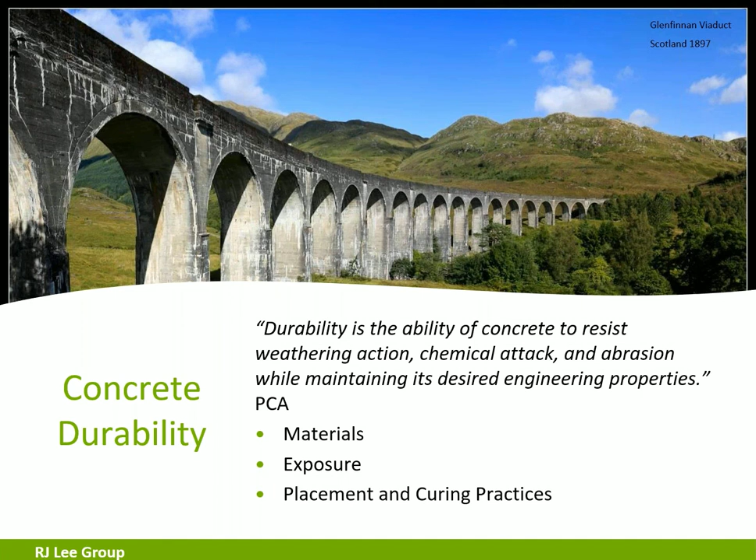Concrete is the most widely used construction material in the world. When it's done right, it can provide decades of service with little to no maintenance. But the conditions of exposure and the use will affect the performance and service life. So the concrete needs to be designed, proportioned, transported, placed, finished, and cured properly in order to achieve its intended service, which some applications are expecting to be upwards of 200 years.

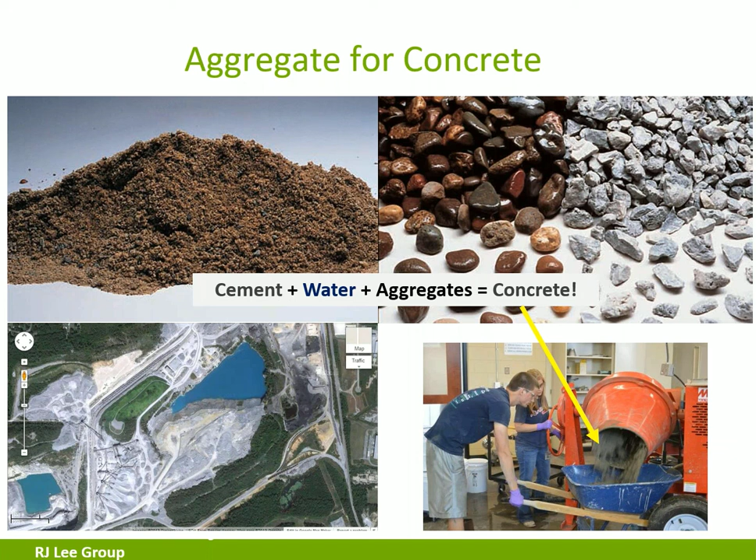The aggregate comprises about 70% of the hardened concrete by volume, and they're more than just fillers in concrete. The aggregate properties greatly influence concrete performance and strength. Qualities of the aggregate can affect the ability of the fresh concrete to be properly mixed and placed, which then can affect the hardened properties and the durability. Many of the negative qualities and properties will be flushed out with preparation and testing to meet the requirements for concrete following ASTM C33, in addition to specifications that are specific to the application, which may include some additional testing and validation of quality.

When we talk about concrete durability, there are several of the most common mechanisms known: corrosion of the steel reinforcement, freeze-thaw cycles, alkali aggregate reactivity, which includes the alkali silica reaction and alkali carbonate reaction. Chemical exposure has another effect on concrete, and that can be sulfate exposure, both externally and internally, seawater attack, and exposure to de-icing salts. Some other reactions are abrasion, erosion, and physical salt attack.

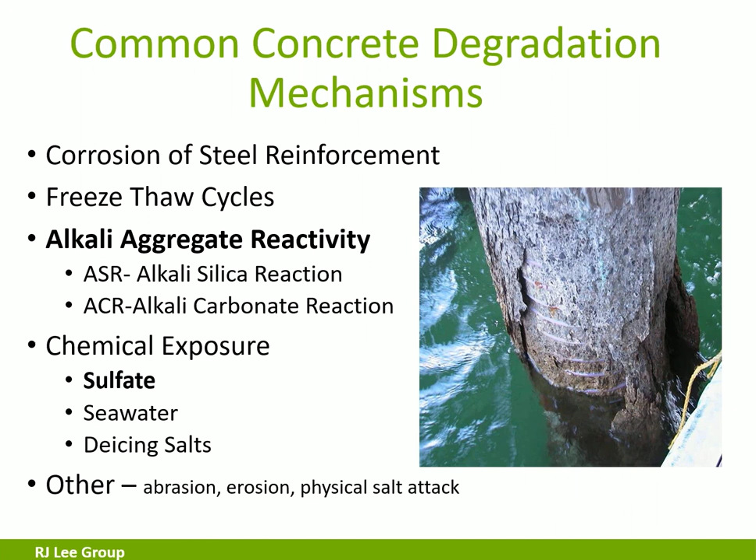So today we are going to talk about the chemical reactions of the aggregate with the cement paste that can affect long-term durability. In particular, that will be the alkali aggregate reactivity, and sulfate, which is actually going to be internal sulfate exposure.

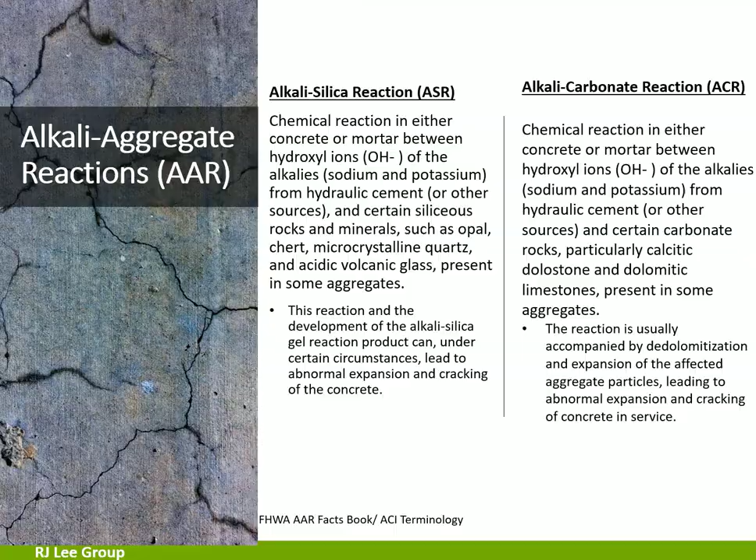So what is alkali aggregate reactivity? Well, we have two kinds. There's ASR, the chemical reaction of the hydroxyl ions of the alkalis with certain silica components of the aggregate. This reaction forms a gel, and under some circumstances that gel can cause expansion and cracking. The other type we have is alkali carbonate reaction, and that is going to be between certain dolomitic aggregate and alkali ions. We'll talk more about that in a minute.

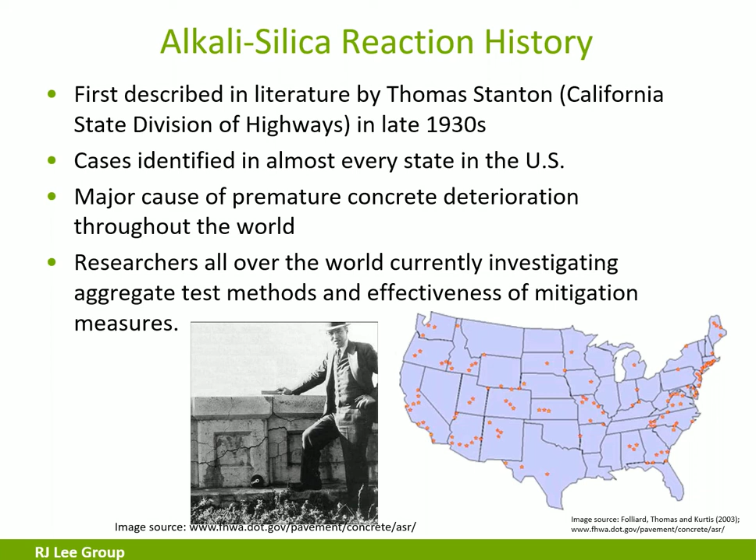Although ASR was first identified in literature in the late 1930s by Stanton, it was observed and documented in many dam structures even before then. It's been studied extensively for decades, and researchers all over the world have dedicated their careers to the topic with really no end in sight for finishing the work. It is a complicated chemical process with many variables and areas of study. We've seen cases in almost every state in the United States, and again, all over the world. It is a major cause of premature concrete deterioration.

So how does it work? Basically, you have a reactive silica component in your aggregate. Some of those reactive components are opal, tridymite, volcanic glass. So basically, it's a type of quartz that is not ordered.

You'll also need sufficient alkali in the pore fluid and moisture. Once that alkali starts attacking the aggregate, it forms an alkali silica gel. That gel expands with water, cracks the concrete, and once you have the cracking, it allows for more moisture to come in and start the process over. So it really is a cyclic reaction.

The source of alkali in the pore solution is going to come mostly from the cement, but we're studying more and more where that alkali could be from the aggregate. You'll also get a little bit of alkali-bearing water intrusion in certain circumstances.

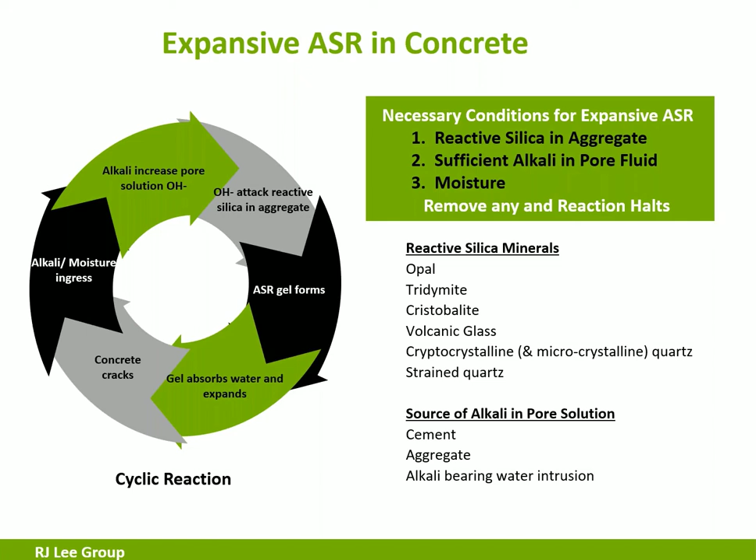So here's an example of some of the damage found from ASR. We have a barrier wall, a lock and dam. That is the physical damage you can see. And then there are a few examples of the microscopical damage we see to confirm the presence of ASR.

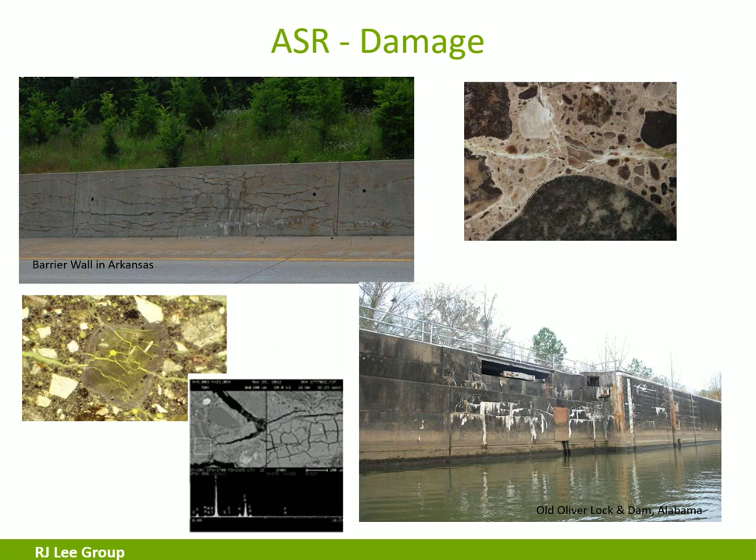Alkali carbonate reaction is not very common. It was first observed in Canada in the late 50s, and it's mostly found in certain dolomitic limestones. Many of these ACR susceptible aggregates are actually not suitable for concrete due to their porosity, which makes them a little susceptible to freeze-thaw damage.

So a lot of them really get flushed out in the C33 testing. Damage shows up pretty quickly here, but there is stark debate in the research community whether the damage to structures by ACR is actually being caused by alkali silica reaction, which is sometimes seen in correlation with damaged structures.

So what happens with ACR is you begin to get dedolomitization of the dolomitic aggregate, and that causes expansive brucite formation. We're finding a lot that sometimes that expansion is correlated with some ASR expansion from very fine microcrystalline silica within the aggregate as well. So that is still under debate.

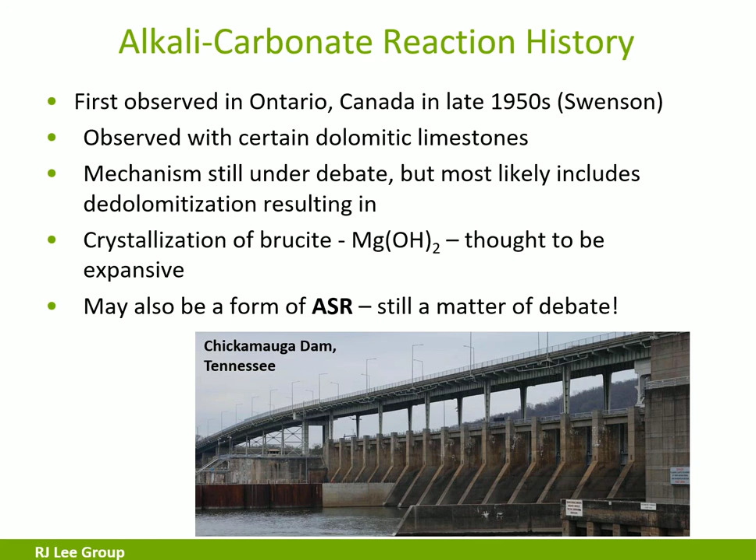Test methods and guidance for alkali aggregate reactivity have had more varieties than geologists have descriptive terms for rocks. It's really hard to decide what to do and how to do it. There are a few guidance documents that have really mapped out a path to understanding the reactivity potential of your aggregate and how to use it in concrete without issue.

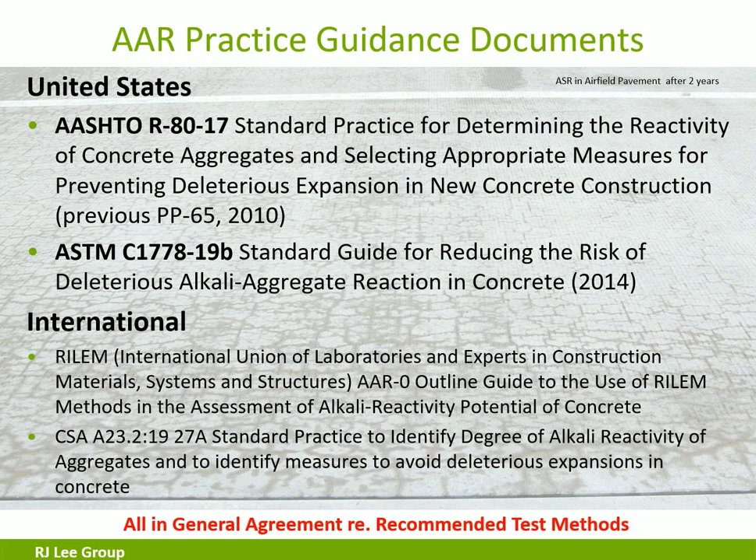In the United States, we have the AASHTO R80, the ASTM C1778, and there are international standards as well. RILEM has a guide, and the Canadian Standards Association. The important thing to note about these guidance documents is they really are all in general agreement regarding the recommended test methods.

The United States guidance documents were developed predominantly from data and recommendations provided by the Federal Highway Administration ASR Development and Deployment Program. That initiated in 2007 and went until 2013.

There were three primary scientists that led most of those investigations: Michael Thomas of University of New Brunswick, Benoit Fournier of University of Laval, and Kevin Folliard, University of Texas. If you go to the Federal Highway Administration website, you'll see all of the reports from these studies on there.

It's really a result of decades of research from scientists all over the world. The test methods recommended in these guidance documents are based on rigorous method validation and correlation with field exposure sites and field history. They have put exposure sites all over the world in many different environments and different mixes, correlating the test methods to establish long-term performance, and also evaluating the long-term performance of current mitigation strategies.

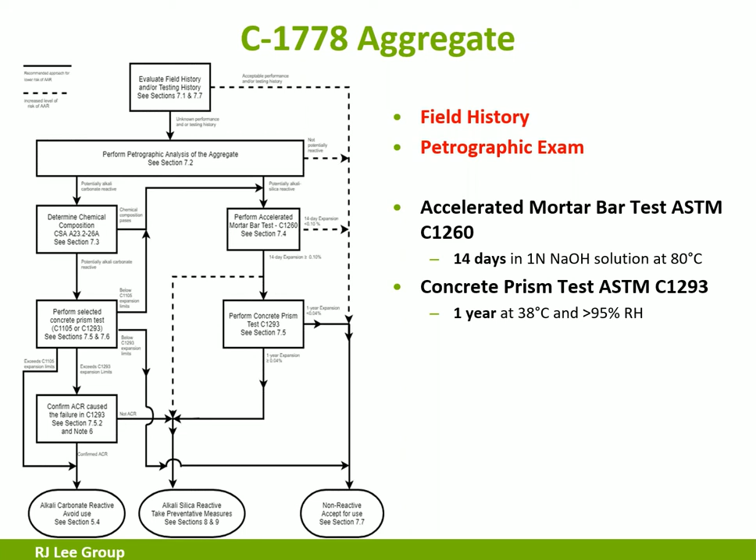So the guidance documents really are driving the specifications. Investment in testing may be high initially from a characterization of what you're working with, but then a subsequent testing regime can be driven from that existing data that you gathered, from requirements from your purchasers.

Some agencies do require your tests to be within 3 years old. And if you have some significant aggregate changes, you may need to do additional testing as well. But you really just want to know your rock and prepare for the worst case scenario to keep you from costly legal issues. Now, this isn't an easy topic.

Extensive research has been going on for decades, and we still haven't developed the perfect test to predict performance. I do suggest that if you're having a hard time understanding this, use a consultant who's knowledgeable on the topic, and they can really help you navigate the guidance and protect your investment.

Looking ahead on the ASR issue, there are some promising test methods that are being evaluated at this time. When I say they want new test methods, you want accuracy, and people just want results fast. There's a miniature concrete prism test and concrete cylinder test that is very promising. Some other methods under development and validation include just modifications to the concrete prism test through RILEM.

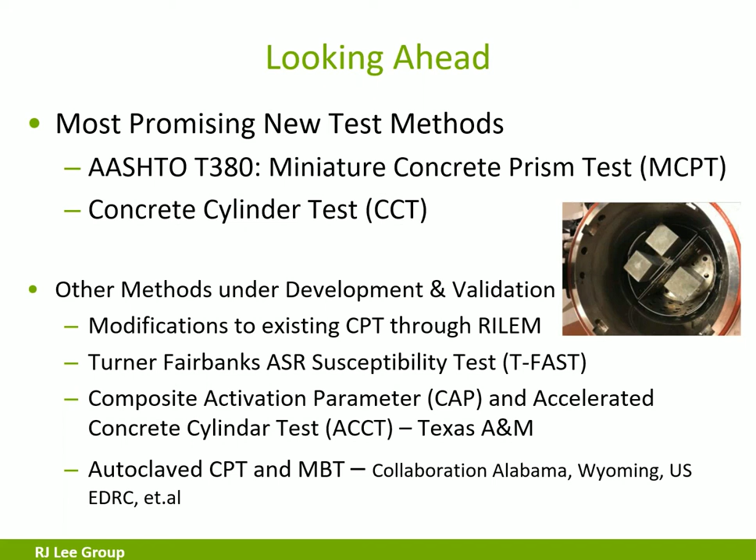There's extensive literature in the acid mine drainage area. As they were mining for coal, you're uncovering shales, predominantly with pyrite in it, and that pyrite reacts with oxygen and creates sulfuric acid, and that sulfuric acid can obviously cause a lot of damage, and it also discolors.

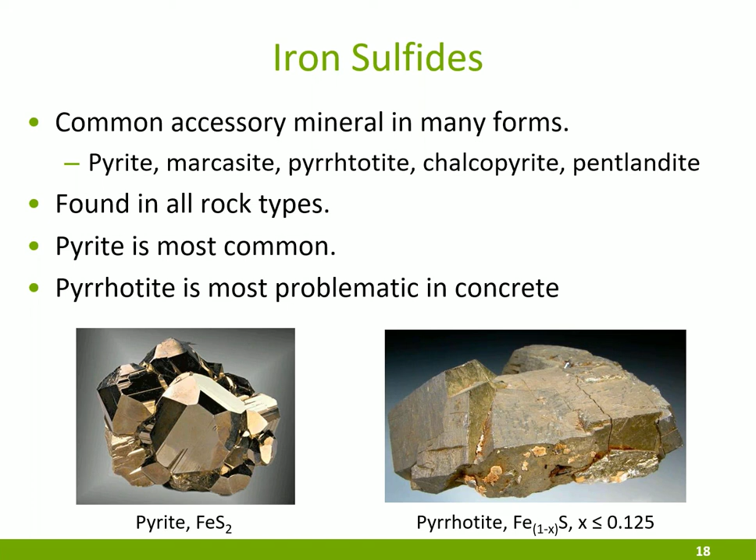Related to aggregate production, access to air, the first sign that you have a problem is that you'll have rusted stockpiles. So again, access to air is number one. And what we found is that material above the water table may have had some weathering already done, where the reaction had taken place previously, so you don't have the severe staining. But once you get below the water table, the rock hasn't seen air before, and that rust and oxidation really takes off pretty quickly.

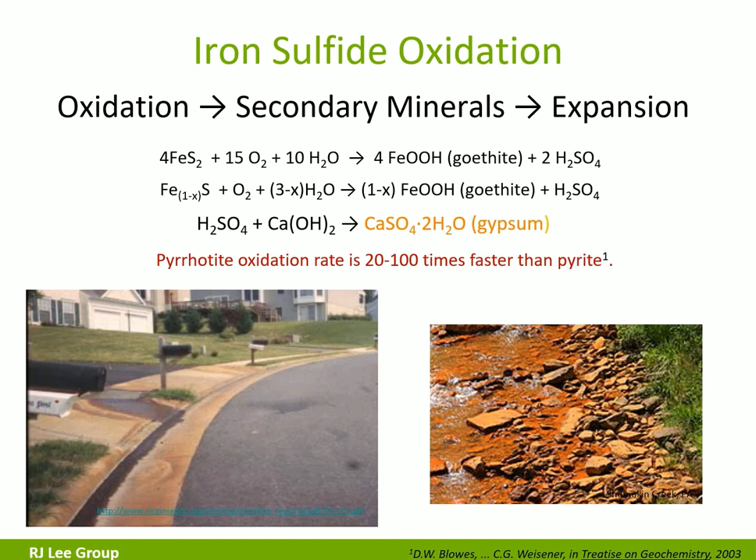When you're talking about having these minerals in aggregate and concrete, the oxidation creates sulfuric acid. That reacts with the paste in the concrete and forms secondary minerals like ettringite and gypsum. These are expansive, they decrease the pH, and you get cracking. In the worst damaged examples, you get thaumasite formation, which creates a very friable paste. It became so friable that you could break the concrete with your hand.

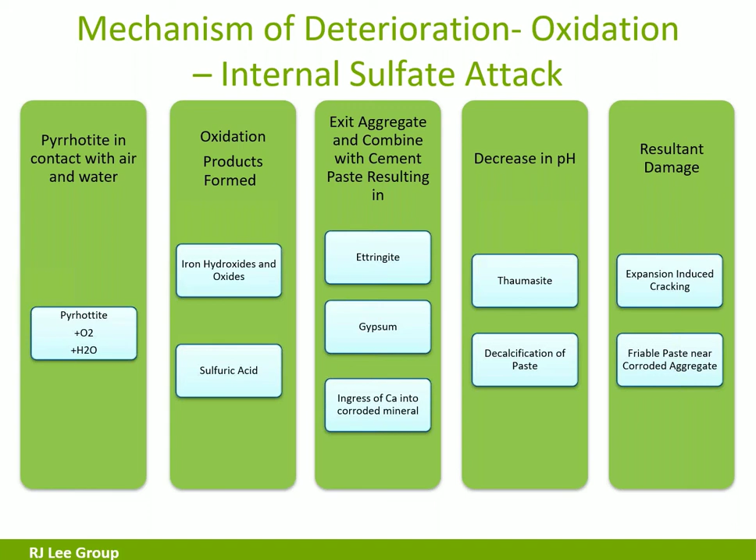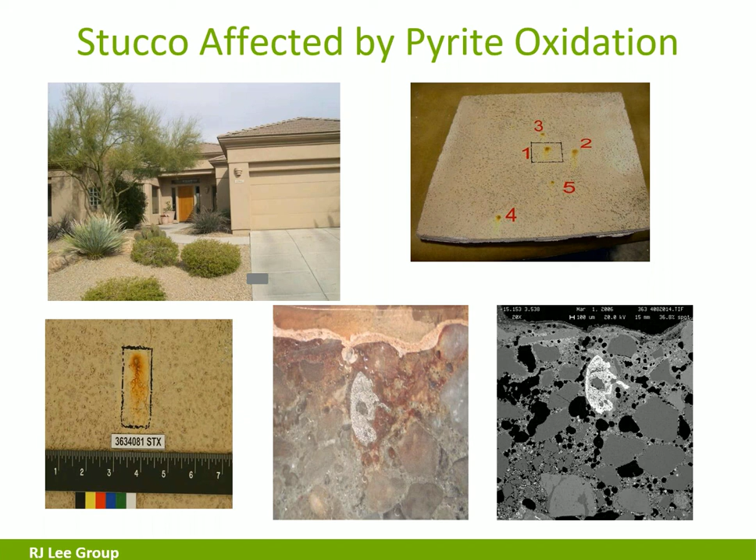There are two recent examples of this problem. The first started showing up probably around 2009, maybe 2006, in the Trois-Rivières region of Quebec, where problems really started within just a few years of construction and these foundations began cracking. In the United States, we have an area of Connecticut which has shown the same or similar kind of damage. These structures were constructed in the early 80s, and it really came out of one quarry in that area — a schist. The damage took about 10 to 30 years mostly to show up.

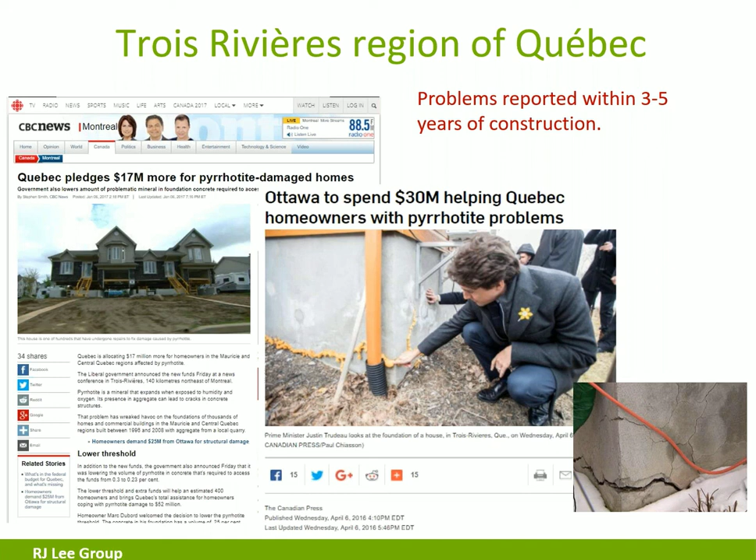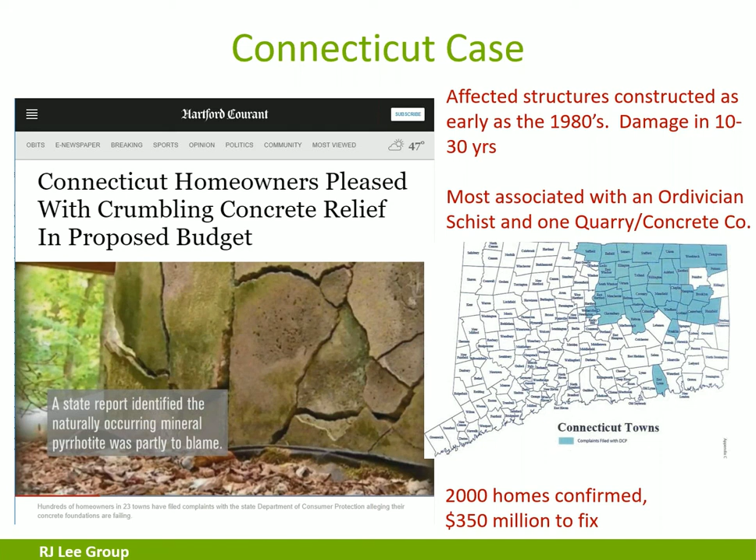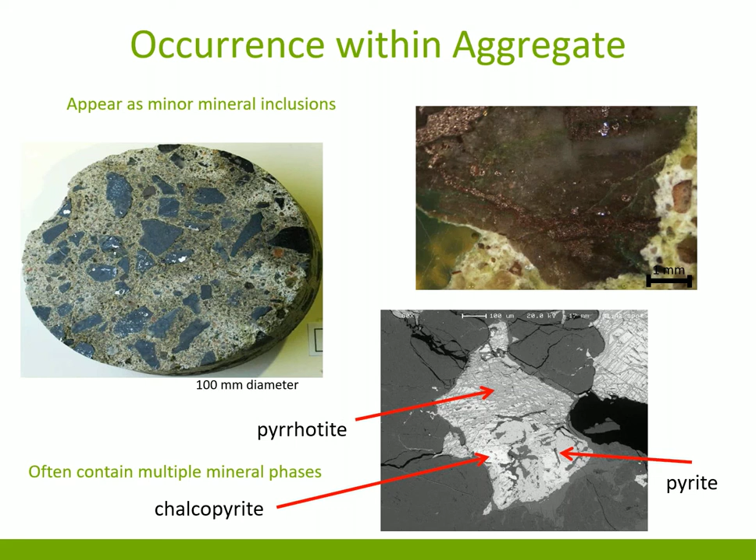There are a number of factors that aren't fully understood about why pyrrhotite can cause damage in one area and not as much in another. Some factors have to do with the quality of the concrete — if you have concrete with high porosity, which enables more air to get to it, you're going to have more damage. We also look at the crystal structure of the pyrrhotite; it comes in a number of forms, and some appear more reactive than others. Environmental conditions matter too — we're finding that relative humidity has a big effect. Buried structures that don't get as much access to air, much like rocks beneath the water table, seem to be more durable and show less reaction. Unlike a foundation wall where the interior surface is exposed to air in your home — the damage really progresses quickly through those walls.

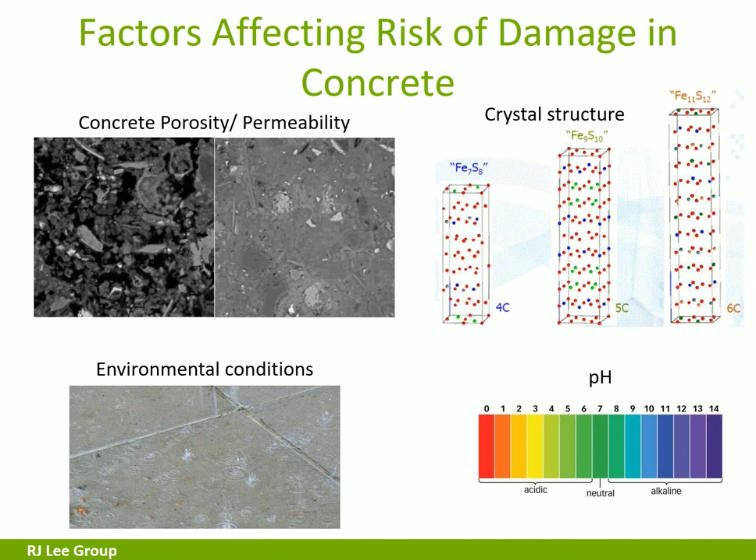Right now, there are no established standards with limits for rejection of aggregate in the United States. The Connecticut DOT does prohibit the use of aggregates with greater than 3% pyrrhotite by mass, based on visual inspections. I don't think they've found any since they started that in 2017.

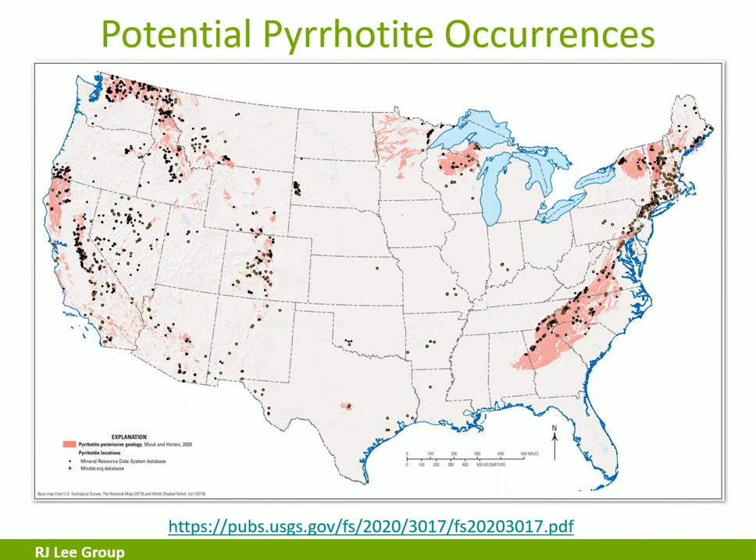The Canadian Standard Association has been doing a lot of research, and they have developed a testing regime for evaluation of the total amount of sulfur in your aggregate and whether it has a potential for damage. That's actually an appendix to their standard, which means it is not mandatory at this time because they are doing additional testing to come up with the correct values. But they do have a nice program that I am going to go over quickly, because really it is the best avenue for us to go down at this time.

Part of it is a performance evaluation for the determination of deleterious oxidation potential of sulfide-bearing aggregates. The first part, you're going to do a field evaluation of the aggregate source with the geological survey and sampling, and some field performance in concrete. If you have concrete that's more than 15 years old using the same aggregate in an oxidizing environment, you can test that to evaluate if a reaction is occurring. The last part is a laboratory investigation and interpretation.

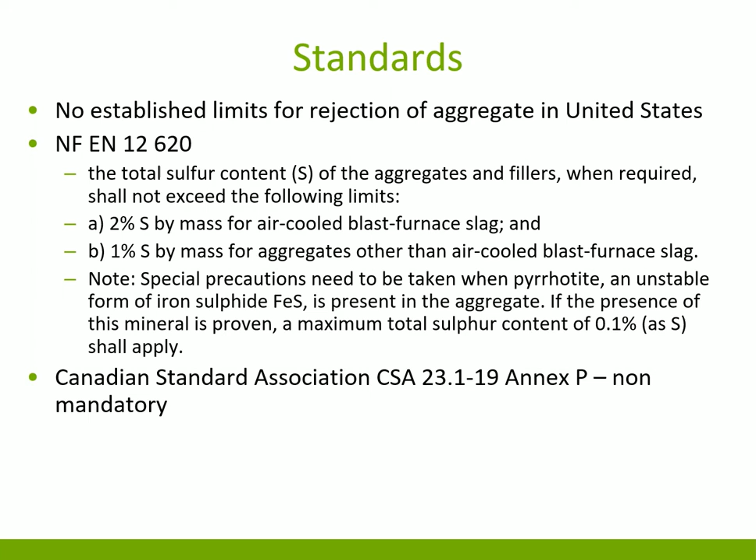In the laboratory investigation, you first look at the total amount of sulfur in your aggregate, and from there you can identify how much of that total sulfur is sulfide sulfur. Based on some European standards and information we have, if your aggregate has more than 1% by weight of sulfur, it's going to be rejected, because even if it's just pyrite, it could cause staining problems. If your total sulfur is less than 0.1, you can accept it. If it's in between, you'll want to test it further.

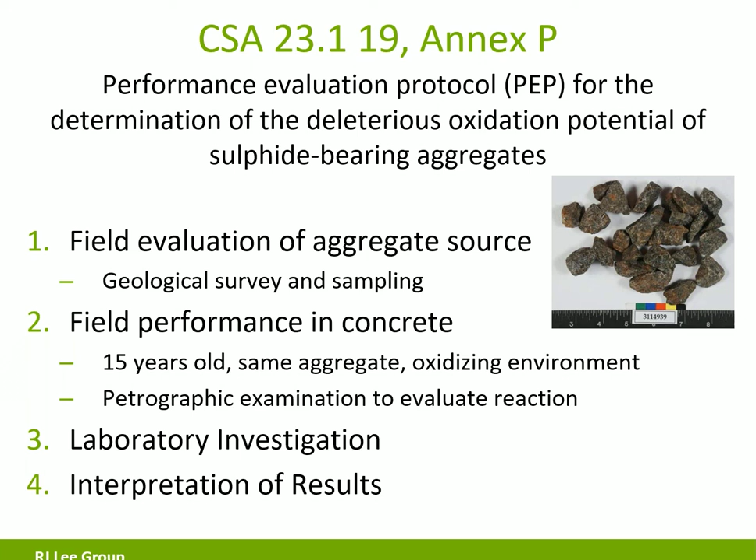First you're going to test for the sulfide sulfur, and then you'll move on and test the potential oxidation issue. The first thing is the oxygen consumption test. I think the limits they're using right now are, if it's greater than 5%, you go to step 3, and if it's less than 5%, you're okay.

The final step is mortar bar expansion, which has 2 parts. The first part is going to promote oxidation in order to determine expansion caused by the expansion products of the oxidation reaction. If you're above the level there, which is 0.1% after 90 days, it could be ASR or iron sulfide, so you have to take a look at your mortar bar after that step.

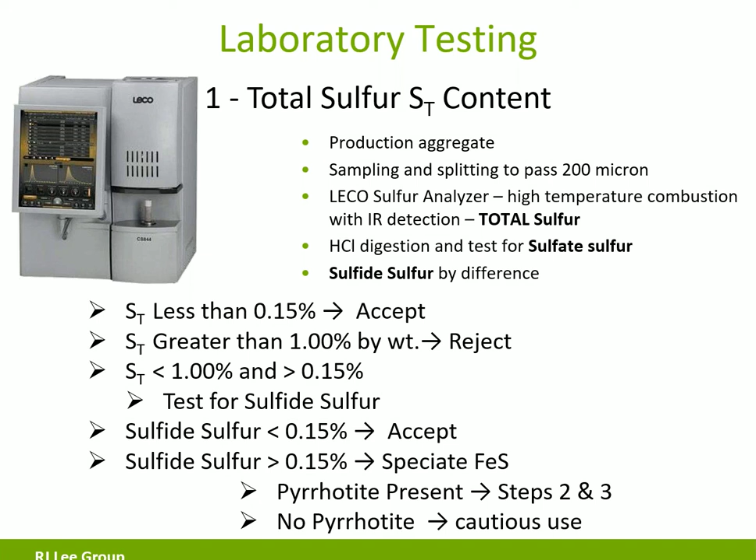So going forward, there's a lot of research that is needed. They are doing it in Canada, they're doing it in the United States. I think the United States is far behind, but we're ramping up at this time, and we are working hard at ACI and ASTM to give some guidance on this topic.

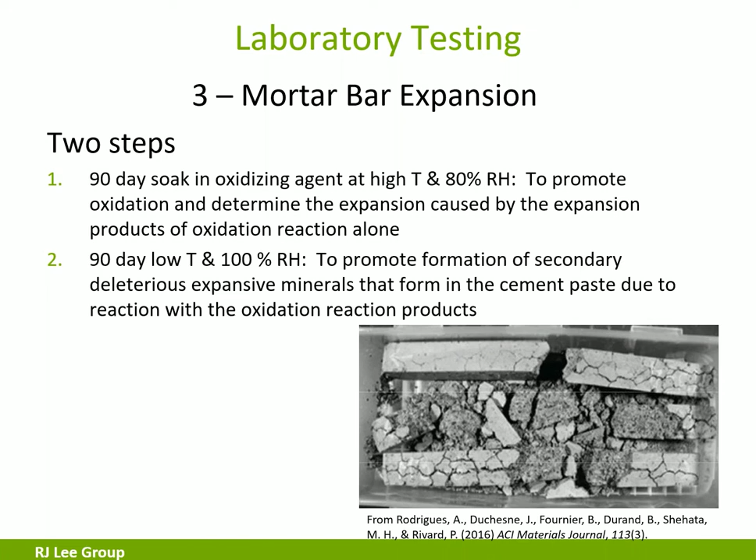Here's a question in the questions tab. Have you used lightweight aggregates to help mitigate the expansive reaction due to ASR in concrete? It has been used successfully in the Western U.S. to meet C1260 testing.

April, did you address that already? No, I personally do not have experience with that, but I know that they're evaluating a lot of different materials to mitigate ASR. You have your supplementary cementitious materials, the well-known fly ash, slag, silica fume, but what's getting more traction lately is the use of natural pozzolans.

Okay, thank you. Here's another question: for pyrrhotite, is it RH of the concrete or the local humidity of the environment? It would be RH of the concrete. And what we've been seeing is there seems to be a sweet spot. Some people may think that you really need a lot of water to get this reaction going, but it really is the oxygen that drives the reaction. There seems to be a sweet spot—don't quote me on this, but between 50 and 70% relative humidity has shown the highest damage.